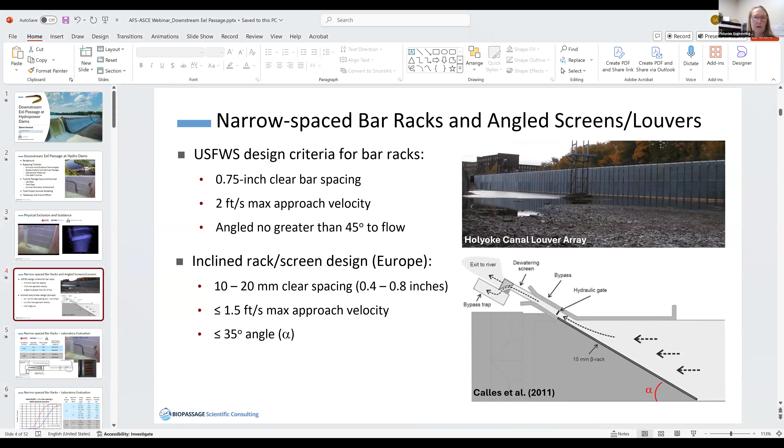So I want to talk about our speaker today. Steve Amaral founded Biopassage Scientific Consulting after working for 30 years at Alden Research Laboratory in Environmental Engineering and Services. He has a BS and MS degree in Fisheries Biology, both from the University of Massachusetts. Over the course of his career, Steve has been extensively involved in the design, evaluation, and application of fish passage and protection technologies at hydropower dams and various types of water intakes. He's also led survival evaluations of conventional hydropower turbine designs to pass fish safely, and several hydrokinetic turbine designs. He's assisted with the development of theoretical models for predicting turbine survival. Much of Steve's fish passage experience has been focused on state and/or federally listed species or species of concern. In recent years, he has led several studies investigating technologies for reducing turbine entrainment of silver eels and has worked on the development of desktop models for estimating turbine and total project survival. In addition to his experience with aquatic resource impacts at hydropower dams in North America, he's also worked on fish passage or protection issues for projects in Estonia, France, England, Romania, Serbia, New Zealand, Brazil, and Cambodia. That's a lot, Steve, and I'm excited to hear what you have to share with us today.

I've divided my presentation into three main things with respect to downstream passage. One is bypassing turbines - what technologies have been investigated to keep fish out of turbines, get them to a bypass system, go to the spillway, operational measures that may reduce entrainment, and the fish-safe turbines that have been in the news lately. Then I'll look at turbine passage, injury, and survival, focusing on lab data, field data, and some estimation methods currently being employed. And then I'll briefly talk about total project survival modeling.

So when you look at all the potential passage routes of eels moving downstream, what's a way of estimating that, particularly if you're not doing field studies - a desktop approach. And then finally, I'll cover what I think are the key takeaways from today's talk, and what future efforts may look like.

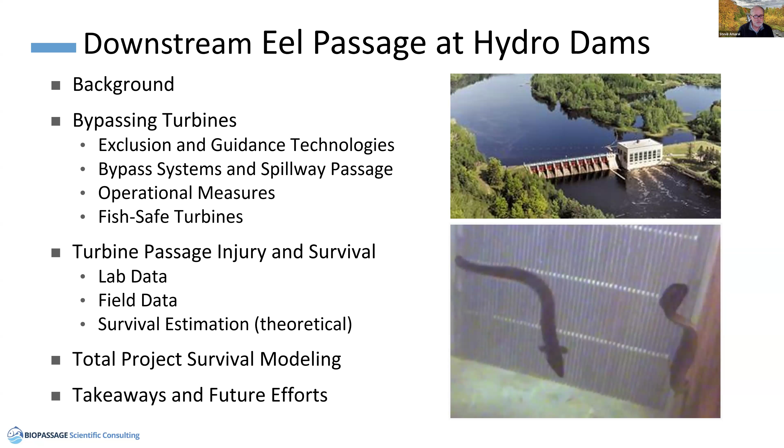So with that, I'm going to start with a couple of videos. I think it's important to remind everybody what we're up against with eels. They're a very unique species, not like anything else we try to protect from turbine entrainment. This first one on the left is a study conducted at Alden with WPI and funded by EPRI, using perpendicular bar racks. There's a bypass located on the left side here. This is a 3/4 inch rack, and I'll talk more about the data from this study in a second. You're going to see this eel approach the rack, interact with it, and eventually become entrained through it.

It does a little bit of searching, poking around, and then eventually it's going to stick its head through the bars and make a real effort to get through. It gets its head through, and it's gone. So yeah, that's the type of behavior we have to deal with when we're trying to think about how to keep these guys out of turbines.

There is hope though, and this video on the right is from a DIDSON camera from a flume study conducted at Alden - same study, but at night with all the lights out. This is the rack right here, and this is the bypass. You're going to see an eel come down on the rack right here, and then it goes over and does go into the bypass. So there is some guidance there.

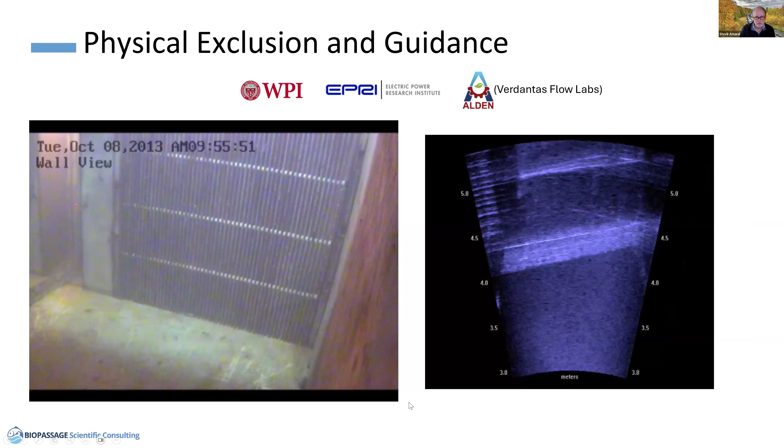Narrow space bar racks, I'm going to start with them, and angled screens and louvers. First off, the Fish and Wildlife Service has developed some design criteria with respect to eels, and I guess these would be applicable to juvenile alosines as well. That's 0.75 inch clear bar spacing, less than 2 feet per second max approach velocity about a foot in front of the intake, and an angle no greater than about 45 degrees to flow.

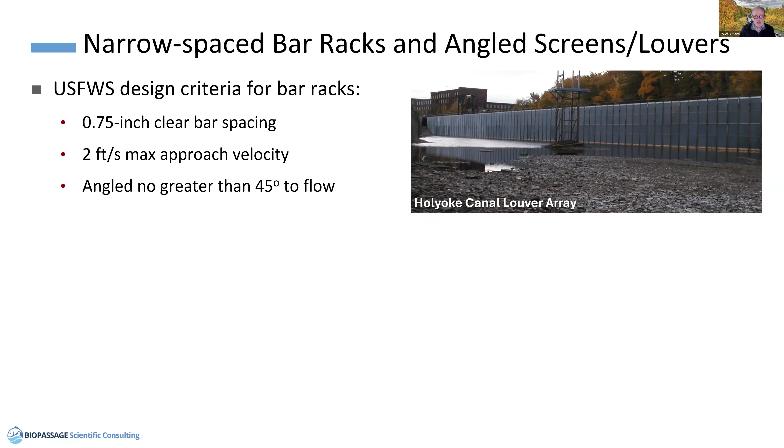The facility you see on the right is the Holyoke Canal louver array with the bypass at the downstream end. This has been tested with eels and likely has a guidance efficiency of about 60 to 80%, and that's a 2-inch spacing on it. It's at a 15-degree angle, so it's a very long sloping rack towards that bypass.

In Europe, they've been using some incline rack and screen designs. Typically they use 10 to 20 millimeter clear spacing, so that's about 0.4 to 0.8 inches. They've recommended about 1.5 feet per second or less max approach velocity, and with respect particularly to these incline designs, an angle of about 35 degrees or less. These have been installed at several sites in Europe, and there have been a couple of installations in Canada, and I believe there also have been a couple of installations in the US.

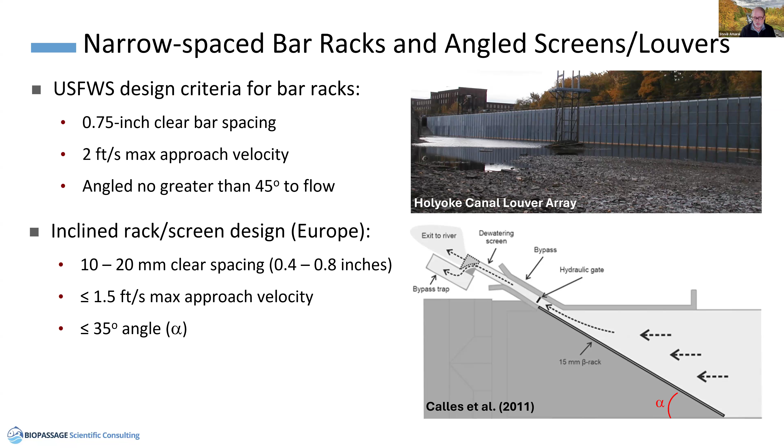Going back to the bar rack study that we did at Alden, we looked at 2 spacings, basically to compare the 1 inch that had been recommended up to that point for juvenile salmonids and salmon smolts, and then the 3/4 inch that was being recommended for eels. We also tested both these spacings at 2 different velocities, 1.5 foot per second and 2 feet per second.

You can see the average length of the eels that we evaluated, pretty typical probably for New England rivers, and then you see the mean bypass efficiencies. Not surprisingly, with the narrower spacing you did have greater bypass efficiency than with the 1 inch spacing. It did appear that the effect of velocity was greater for the narrower spacing than for the 1 inch. So 69 to 72% for the 1 inch and 89 to 96% for the 3/4 inch.

The test facility, we did release fish upstream. There was a wall here that kind of helped them stay on this side of the flume, so they interacted with the rack, and then you can see where the bypass was located. The picture on the right is just a dewatered snap of the test facility.

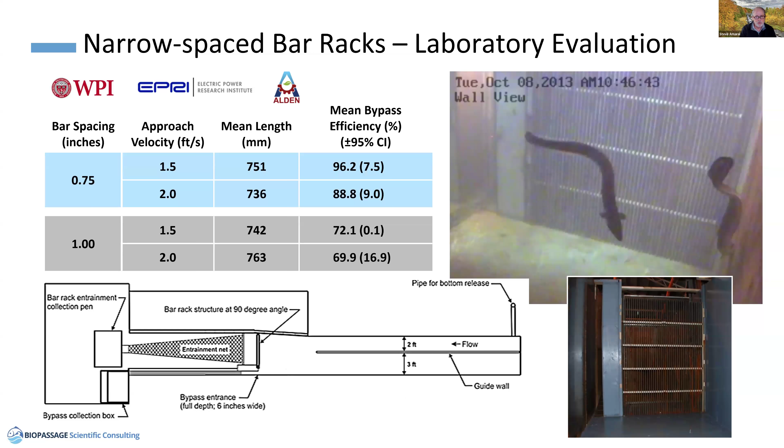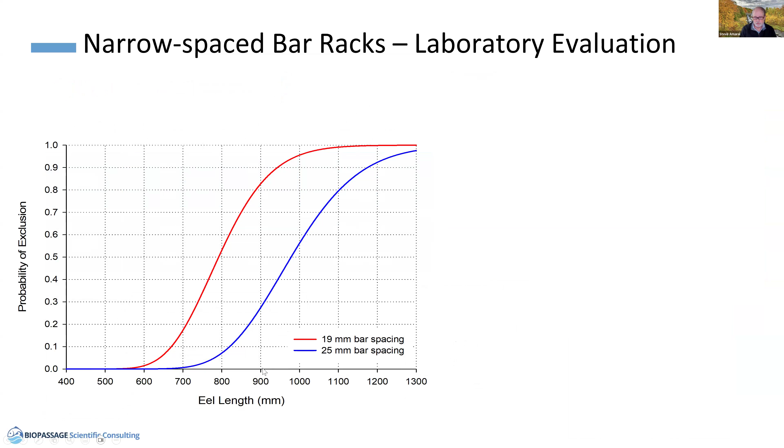Some of the interesting things we learned from this study: we were able to develop curves that show eel exclusion, physical exclusion by length, for the 2 different spacings. What we found out was that eels could have head widths, which is the most incompressible part of their body, that were up to 1.3 times the bar spacing and still fit through. They would basically have to have a head width greater than that ratio of 1.3 to have 100% physical exclusion.

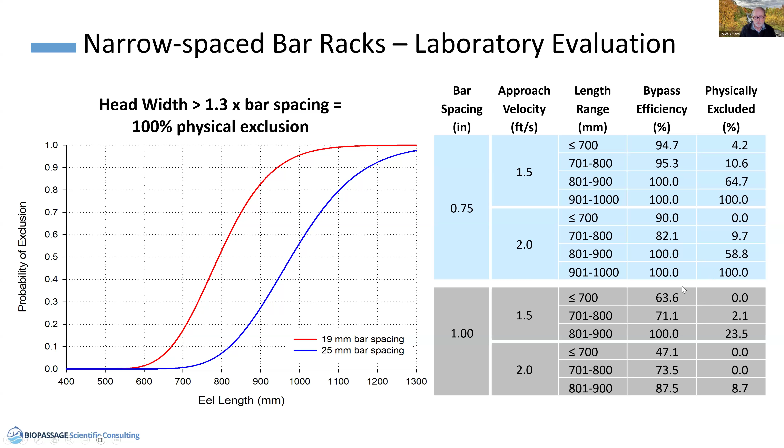Moving on to behavioral deterrents and guidance systems, there's been a lot of work done with these technologies since, I would say, at least the 80s. A lot of focus on light, both continuous and strobe, and a lot of testing with sonic and infrasonic sound and vibration. More recently, there have been studies with electric fields, turbulent and accelerated flow paths, and EMF.

One of the studies that myself and the folks at Alden were involved with was for the Eel Passage Research Center, a collaboration of power companies and agencies from Canada and the US involved with the St. Lawrence River. They were trying to identify potential methods to guide eels at the Iroquois water control structure, which is upstream of two big dams on the St. Lawrence. The idea would be if you could get them to a location across this structure, trap them, and then haul them downstream past the two projects.

Both of those projects, because of their size, it's really difficult to design anything effective at the site. They decided that the water diversion structure was a much easier facility to test this type of thing at, even though this water control dam is almost 1 kilometer wide.

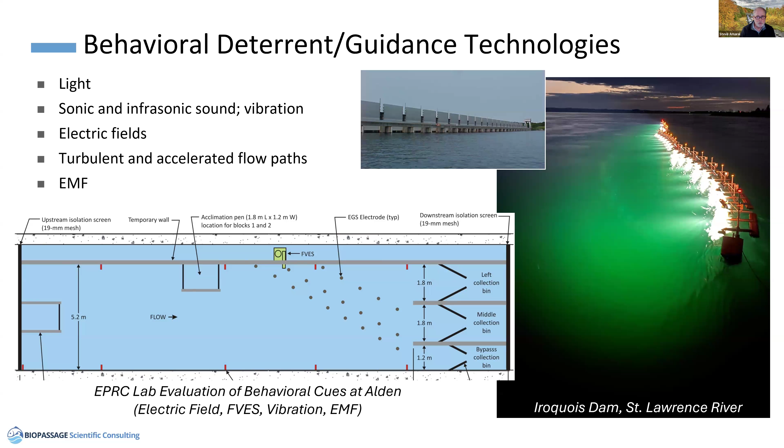Moving on to bypass systems, we have surface weirs, submerged entrances, mid or near bottom. There's a zigzag horizontal conduit developed by a company in Germany, and closer to home at the USGS Conte Lab, Alex Haro and his colleagues developed what's called an airlift system. I'll talk about each of these in more detail.

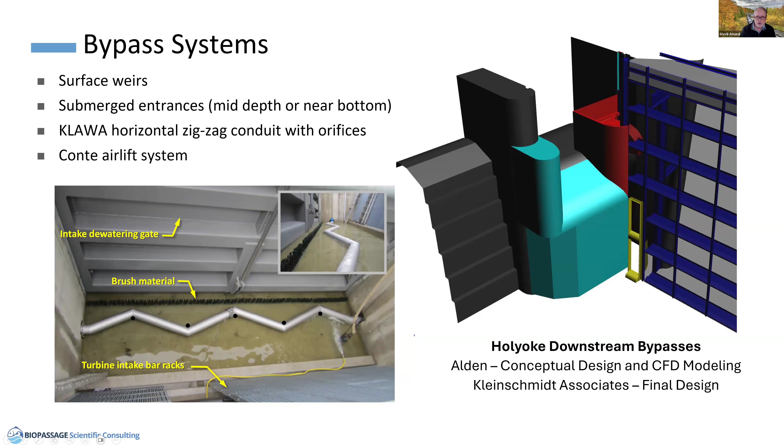What you see on the right is a downstream passage facility developed by Alden and Kleinschmidt for the Holyoke Dam. This is for a combination of species, and it includes both a surface bypass and a mid and bottom bypass for the more benthic species, which would include eel and sturgeon.

Alden did an evaluation of the KLAWA zigzag system that included both lab and field testing. This was funded by a grant from the U.S. Department of Energy Water Power Technologies Office. We had teaming partners that included Blue Leaf Environmental and Lakeside Engineering.

For the laboratory evaluation, we evaluated both the KLAWA zigzag and also vertical systems developed by Lakeside Engineering, John and Eric Truby. This is a 20-foot wide flume, a nice simulation of an intake with full-scale bypass systems installed. We tested both 1-inch and 2-inch bar spacing, and with and without a 16-inch perf-plate overlay on the lower portion of the rack for one test, then looked at entrainment and bypass efficiency.

The first test we did both bypass systems with a 2-inch rack and no perf plate. The bypass efficiencies were relatively low, less than 50%. We then tested the zigzag only, added the perf plate, and saw the zigzag system had a 75% efficiency. So the perf plate seemed to help slow down eels moving through the rack and gave them an opportunity to find the bypass openings in the zigzag.

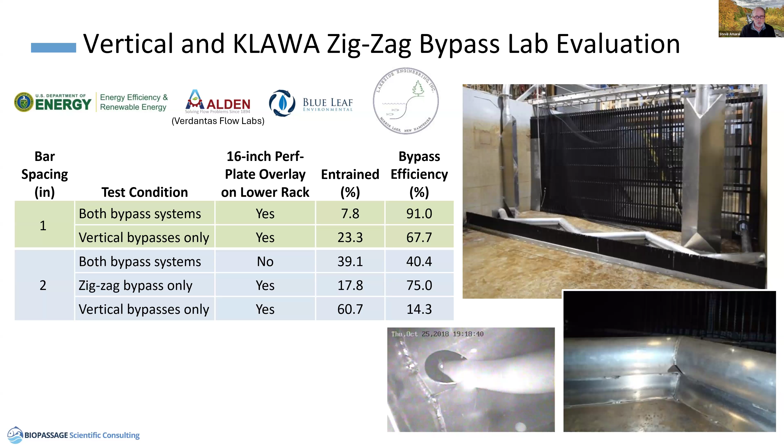Based on the positive test results with the 1-inch spacing, we went to a field site—essentially supersizing our test flume—with a nice intake channel down to racks in front of 2 turbines. Unfortunately, only one of the turbines was operating for the testing, but the Trubies did install the system across the whole intake.

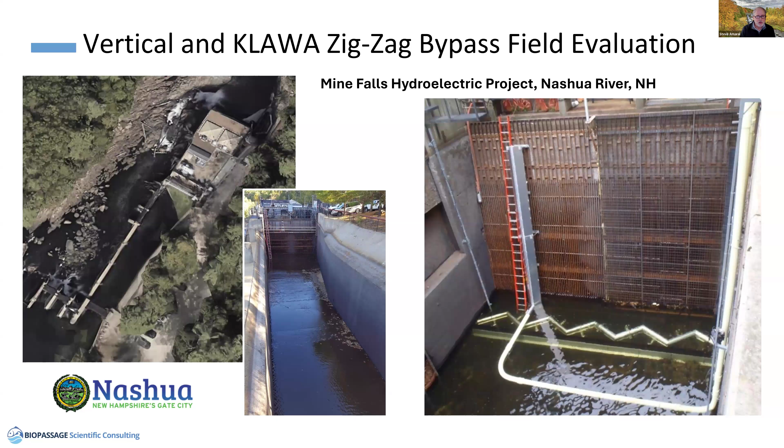We put an overlay of just over 1-inch spacing on the operating turbine, and tested with and without that overlay for the reduced spacing. This was on the natural river up in New Hampshire. The results weren't as good as we saw in the lab. We did 4 separate releases: 3 with the narrower bar spacing, 1 with the larger 3-inch existing spacing.

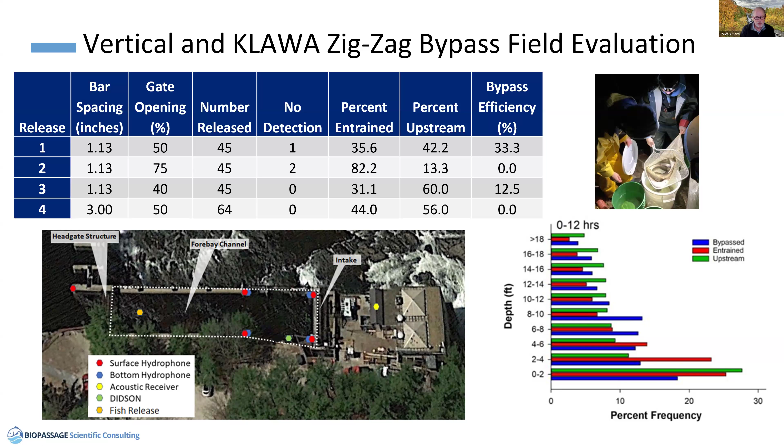You can see our setup here with the acoustic receiver arrays in the channel and where we release fish, the yellow dot. Some interesting findings with respect to eels: they did do some searching when they came to the intake. However, most were found in the lower 2 to 8 feet of water depth, which is where we'd expect them at most projects. But they will search vertically, and that was one reason for developing the vertical bypass design as well.

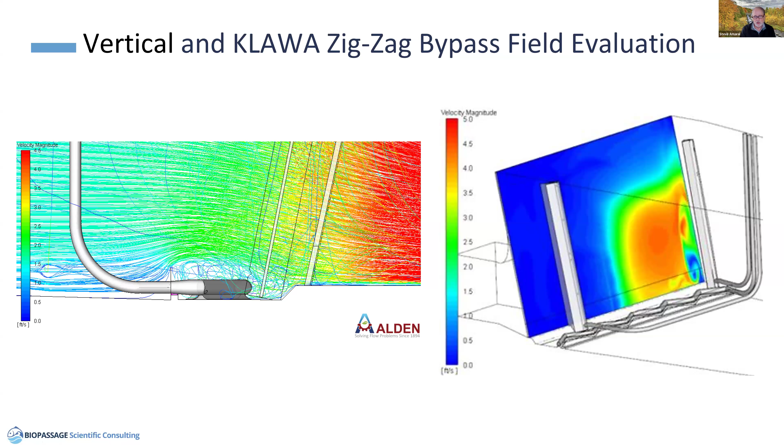This is probably the reason for the poor performance: we have high velocities. This is a CFD model done by Alden. You can see a section with flow moving left to right, a zigzag system on the bottom, and then the intake rack. Velocities get up to almost 4 to 4.5 feet per second in some areas, which is simply too fast for the fish to overcome without being pinched or entrained. At a better site, without those kinds of velocities, this system might work better.

There's a system installed at a project in Connecticut, the Upper Collinsville project, which was an abandoned site completely rehabilitated to produce power. They put in a pretty nifty bypass system for shad, herring, and eels. Although it's a zigzag system, it wasn't constructed by KLAWA, it was done by Wasserkraft. You can see they have a horizontal 3/4 inch rack.

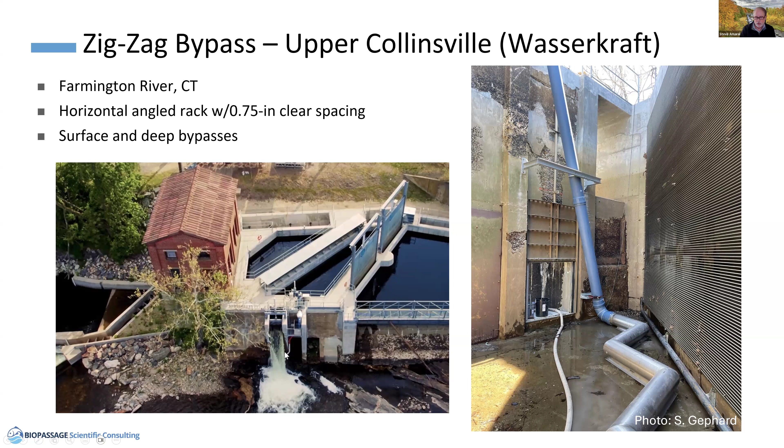They have the zigzag system for eels, with surface and deep bypasses. You can see the surface spill here. This is actually the outlet for the zigzag system, and then there's a collection tank where they take the eels out, handle them, count them, and put them into a little chute to go back to the river. A few more pictures of this system.

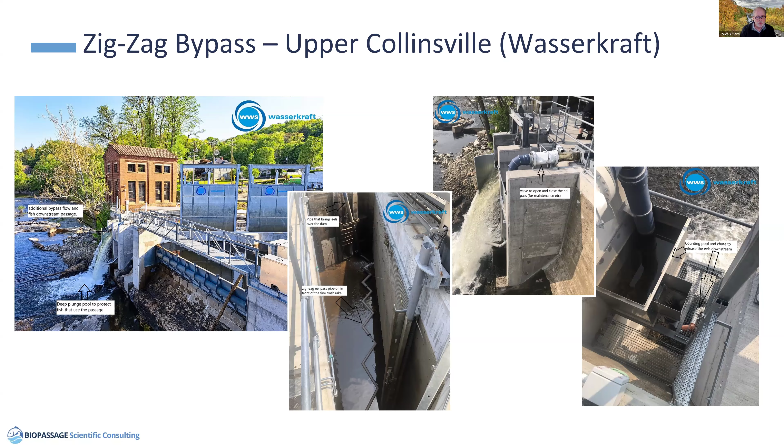They have not done any evaluation of the effectiveness of this system, and from what I was told, there are no plans to actually test it at this point.

The airlift bypass system was developed by the Conte Center by Alex Haro and his colleagues. It's basically a low-level bypass with a riser filled with pumped air. It creates a current going up, and fish enter at the bottom and go up, discharging in these applications into a collection box where they can be removed and put downstream. It was installed at two water supply reservoirs, and you can see the number of eels collected in the system during the years it's been in operation.

Moving on to spillway passage and survival. Spillways in existing gates can often be used for safe downstream passage. At many sites, survival rates will be greater than for turbines, likely exceeding 95%. However, you do need sufficient flow over the spillways.

I'm not sure we really know what is required for eels, but in order for them to pass there probably needs to be somewhere around 3, 6, 9 inches of depth, something that could be investigated. I know there are requirements for shad, herring, and salmon as far as minimum depths over the crest.

Typically you'd have to do an assessment of the spillway design to determine how fish-friendly it may be, just by looking at the flow going over, the hydraulics, turbulence, and what the fish are landing on. Based on that assessment, you may want to do an evaluation of survival. There's not much you can do about fish passing over spillways, obviously. Eels go out typically with pulses of flow, so you're likely having a spill event, and you can't really keep them away. But when you estimate total project survival, you want to make sure that component is accurate.

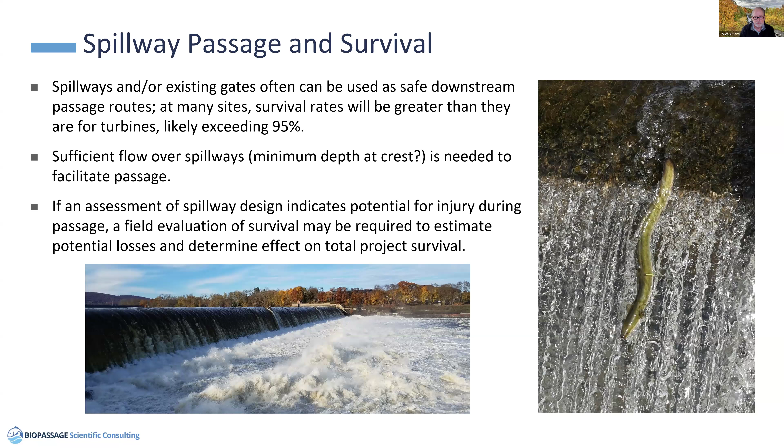So there have been a couple of spillway survival studies done, and the data included on this slide is from an evaluation at Turner's Falls, FirstLight generation complex there. It includes Northfield Pump Station, Cabot Station, and a couple of smaller units in the canal. But certainly the gates at the Turner's Falls Dam are potential passage routes for eels moving downstream.

This table was pulled from the Kleinschmidt, Gomez, and Sullivan report. Normandeau did the testing using balloon tags. They evaluated the turbines and the Bascule gates. You can see here in the highlighted rows, Bascule Gate 1 up top and Bascule Gate 4. So this is Bascule Gate 1 here, Bascule Gate 4 would be on this side. They did releases at 3 different discharge rates for each gate, and you can see a combined estimate of survival.

You have immediate 1-hour survival and total survival after 48 hours. This 82.9 looks a little suspect given the 3 flow rates had higher survival, so I'm not sure if that's a typo, but you can see it range from about 85 up to 88% for Bascule Gate 1 and 83 up to 90% for Bascule Gate 4... 93.3%. Interestingly, the units at the downstream end of the canal at Cabot Station had survival rates of 96%. So you're actually getting better survival through the units than over the gates at this location, which may be the case at some projects.

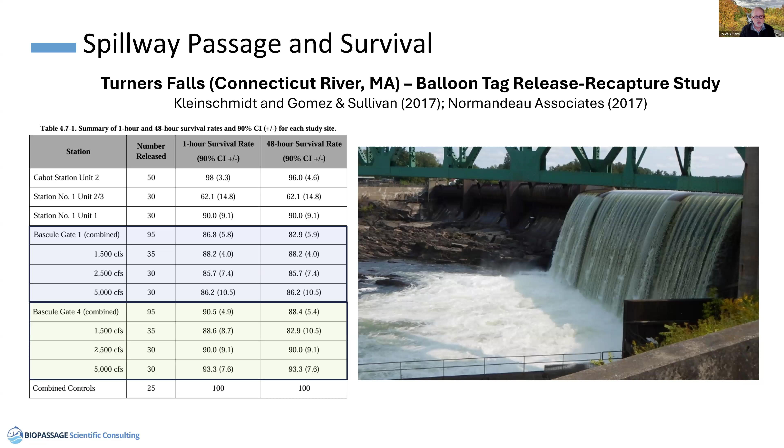Another study that I was involved with was conducted by Alden for the Woonsocket Falls project in Rhode Island. It's owned by the city of Woonsocket, but operated by Thundermist Hydro. Small project with a 10-foot dam. It's a Corps of Engineers dam. The intake to the turbine is further upstream here.

And the plan here may be for nightly shutdowns and then allowing eels to pass over the spillway. Fish and Wildlife Service requested the spillway survival study. It's kind of a unique approach we took in that there wasn't easy access downstream for a balloon tag effort—no boats or anything like that for getting people down there. And again, being a small dam, you can see there's a sidewalk up here where the public walks right by, and then there's this wall down to the base of the spillway.

So what we ended up doing was we built a pipe here, put tethers on fish, attached them to a rod and reel and fishing line, and released them through the pipe over the dam. Then as they came over the ogee, we picked them up with the fishing line and put them into this net and pulled them up. You can see them being emptied out here. So this fish on the right is actually tethered to the fishing line as it's going over the spillway.

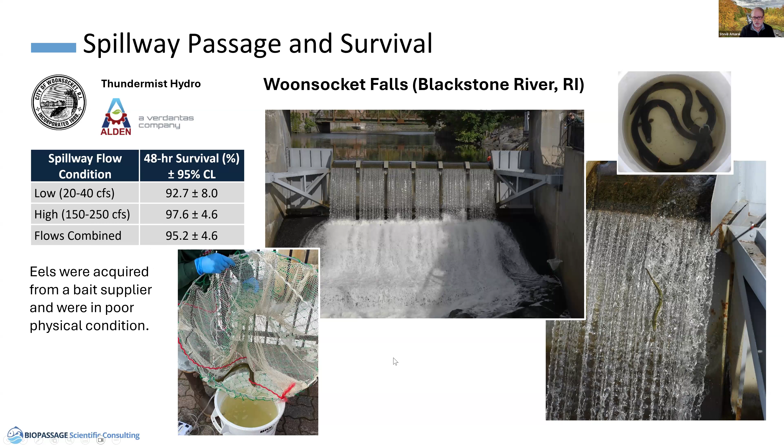All right, moving on to operational modifications. Nightly shutdowns are something that can be done from 6 p.m. to 6 a.m. for the entirety of the specified downstream eel migration period. You also may be able to do targeted shutdowns based on precipitation events, or reduce generation so you're reducing flow and hopefully reducing the number of fish that go into the turbines. Bypasses can be used if sufficient spill is needed to get the eels downstream, and there's been some work done with models to predict the peaks and help with operational modifications.

A lot of this work has been done in Europe, and you see an example here from some projects in France, where they basically have reference sites, look into migration surveys and environmental cues, develop prediction models, and then apply it on a wider basis.

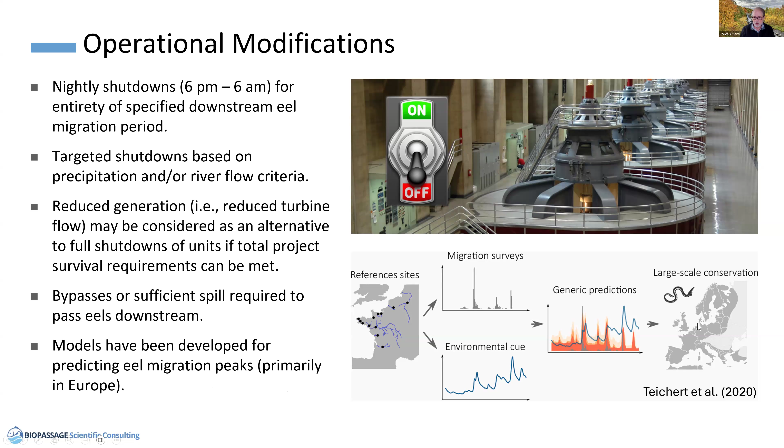Moving on to turbines, there have been several developments with fish-safe turbines that are very applicable to eels. The Alden turbine, some of you may be familiar with, has not been installed anywhere, but it was tested with eels in the early 2000s in a pilot scale facility. Basically it's designed with a few blades, so very wide spacing, no gaps between the blades and the outer ring or the hub.

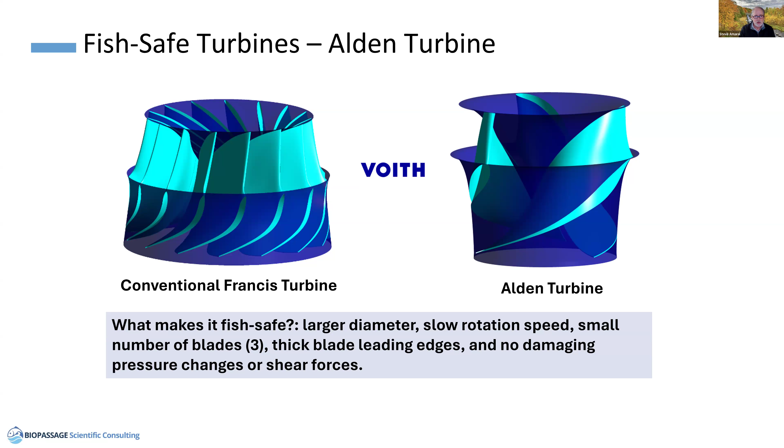It was designed to reduce damage, pressure, and shear. It's a radial flow unit like Francis turbines, but unlike Francis turbines, which have 12 to 16 or 18 blades, it only has 3. Again, those wide gaps between the blades reduce the probability of strike, and thicker blade leading edges help reduce strike mortality. We think survival for that turbine could be 98% to 100% for silver eels.

I can't imagine most people have not seen any news on the developments with the Natel RHT turbine. A. Schneider provided me with this slide and a couple others. They've had some very successful testing with this unit that's been evaluated in their test facility in California. You can see the conditions here: 10-meter head, 55-centimeter diameter, 667 rotational speed.

They had 100% survival immediately and at 48 hours. So these slanted curved blades, you can see the eel passing through. Despite the high rotational speed and the small diameter of the unit, the eels were able to get through with 100% survival.

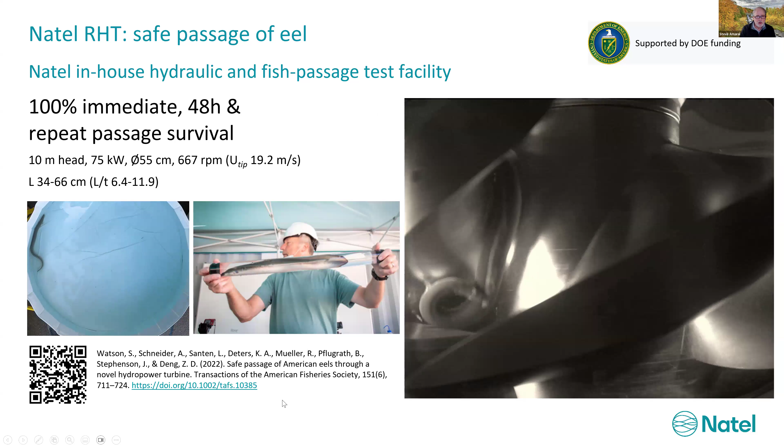Natel is now working on developing these turbines for hydro modernization at a wide range of projects with respect to project size, head, and flow. They're expecting greater than 98% eel survival for these full-scale systems.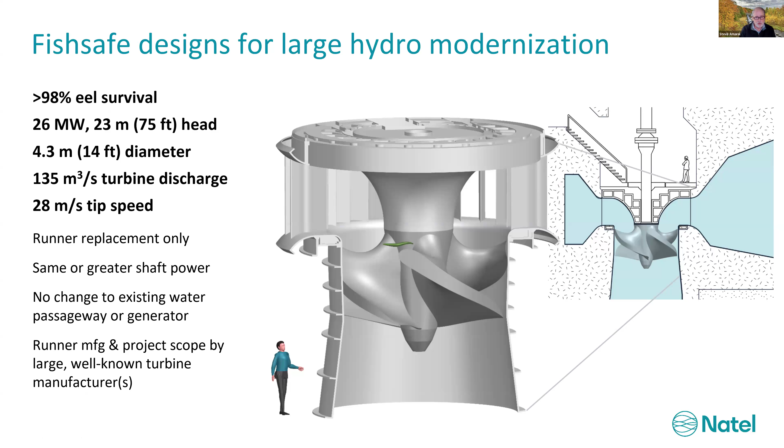And just a couple of conceptuals here for different designs of these units, including a Francis turbine with fewer blades. But you can see the theoretical estimates, which are based on CFD modeling and the lab data. So there are expectations for these types of units if they are installed. Very, very promising and good results.

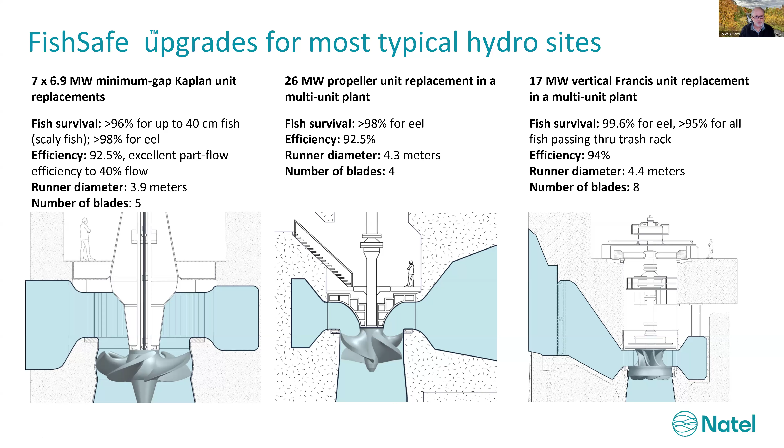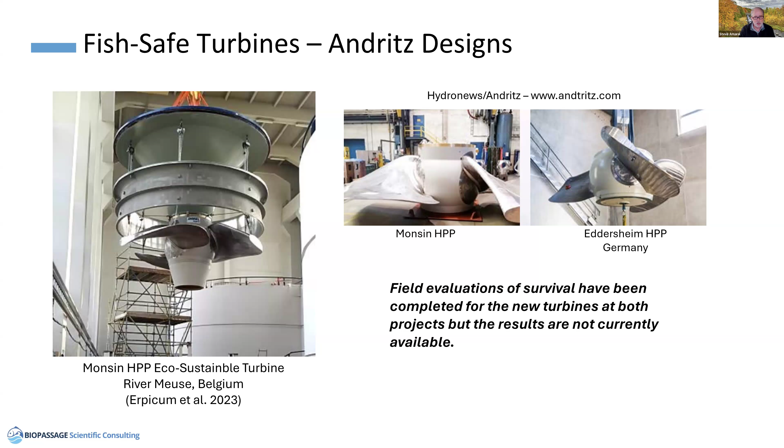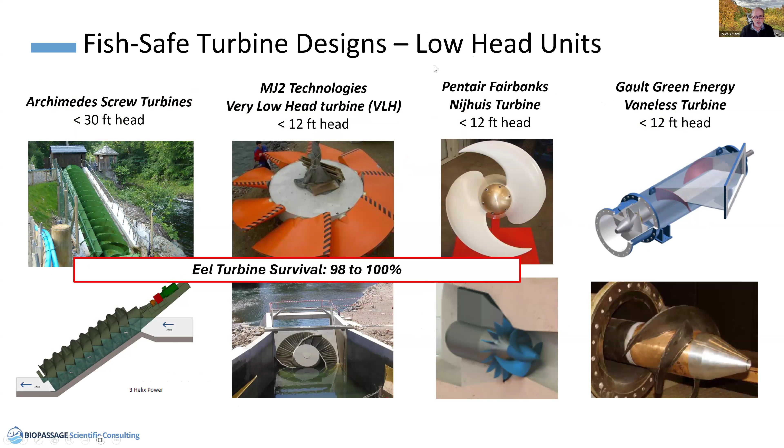There are a number of low head turbine designs like the Archimedes screw, the VLH, and this Nijhuis turbine. They have been developed for heads typically less than 30 feet and some of them for less than 12 feet. But there have been testing done at least with these 3 designs, and again, very promising 98 to 100% survival of eels going through these units.

All right, now that I'm through all the sort of options for downstream passage technologies to improve survival of eels, I'm going to take a little deeper dive into the turbine injury mechanisms and survival studies, and a little bit of history. This stuff has been going on at least over the last 30 years, but even longer than that for some of the field evaluations.

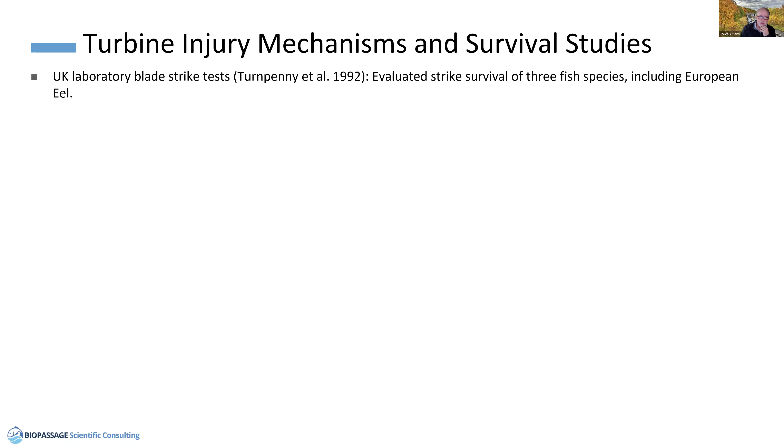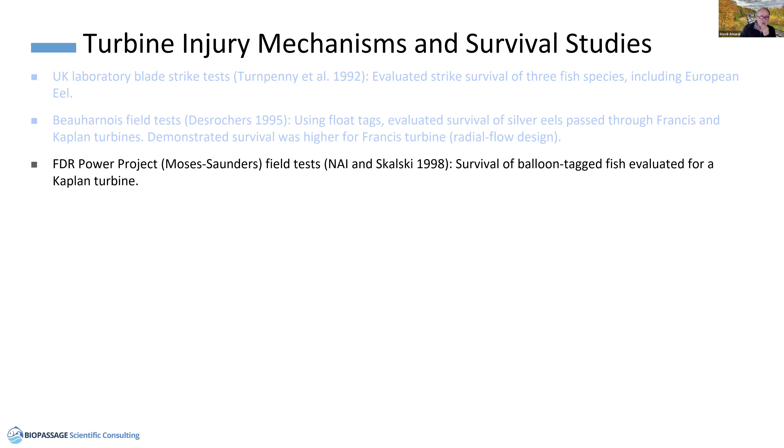There were some blade strike tests done in '92 with European eels. Some of the first field tests done in the US were on the St. Lawrence project, including the Beauharnois, which had a Kaplan, and the Francis turbine. Moses Saunders, upstream of Beauharnois, had balloon tag studies conducted there.

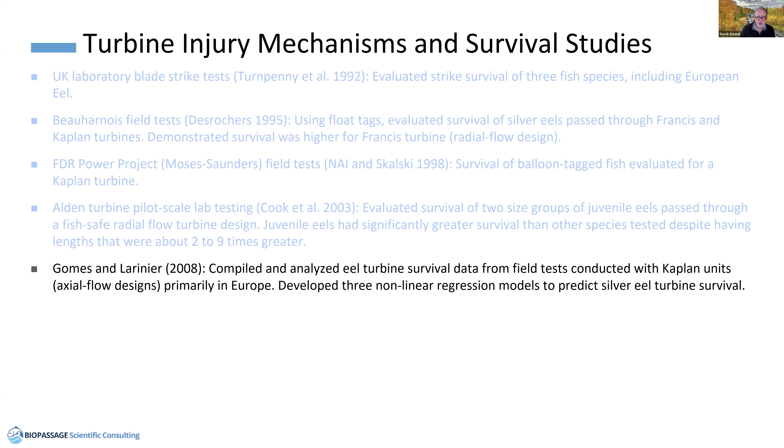Alden did the pilot scale testing with its fish-friendly unit and 2 size groups of juvenile eels. Gomes and Larinier compiled the field data from European studies and some of the US and Canadian evaluations, and developed some nonlinear regression models for predicting survival.

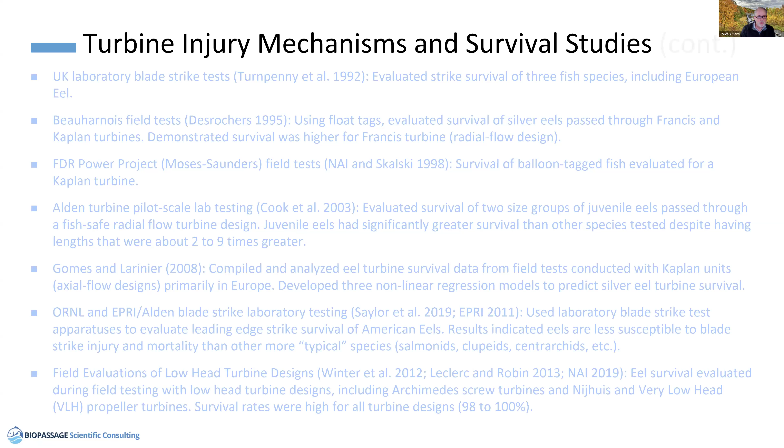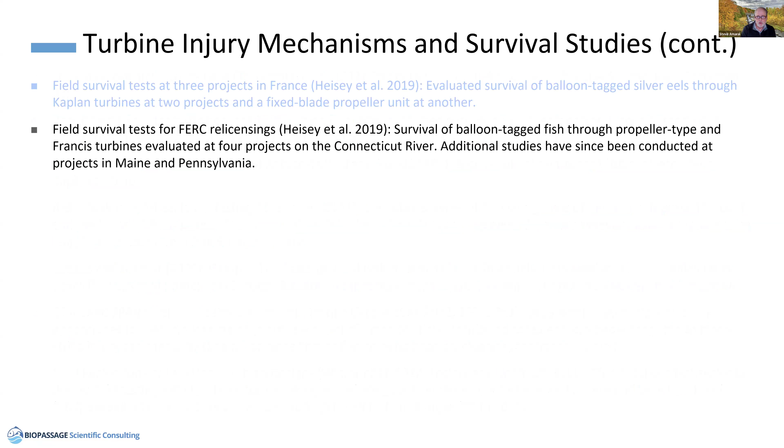There was some laboratory blade strike tests conducted by Oak Ridge National Lab and by EPRI and Alden. Field evaluations of low head turbine designs were conducted, and again, 98 to 100% for some of those. More field testing was done in France for 3 different units by Normandeau. And then there were field survival testings for many of the FERC relicensings that were conducted recently, both Francis and Kaplan type units in the Northeast.

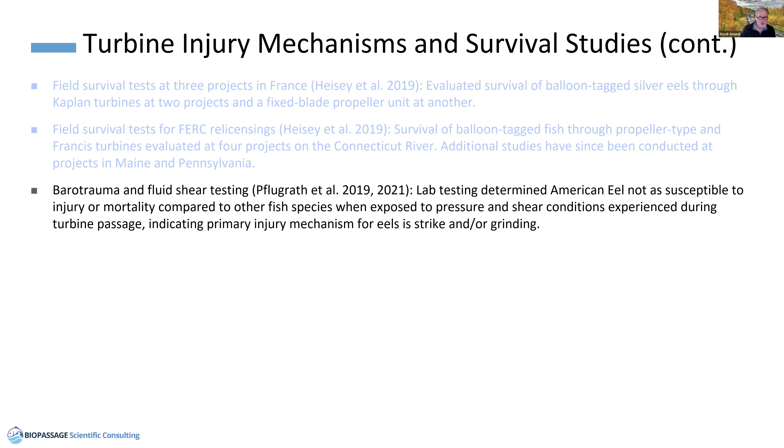PNNL did some barotrauma and fluid shear testing with eels, and the big finding there was that they weren't as susceptible to damaging pressure and shear levels compared to other species, and they concluded that strike and grinding were likely the primary mechanisms for eel injury going through turbines. Then, of course, Natel and its RHT turbine development and the evaluations that they've done with their facilities in California.

So just to get everybody on the same page as far as the two different primary turbine designs we have: radial flow units like the Francis turbines on the left, and then the axial flow unit on the right, which would be a Kaplan or a fixed blade propeller. So fish entering the scroll case, moving down through here axially, the eels moving through here, the scroll case, and then entering the unit radially.

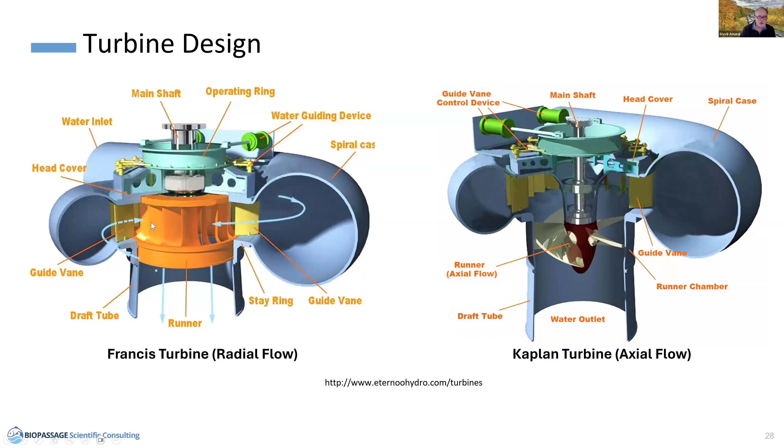This is the results from the Alden testing in the lab with a pilot scale runner, 40 feet head, 245 RPM, best efficiency. These are the species that were tested, and these are the non-eel species.

You can see the relationship between length and survival. It's what you would expect: the longer the fish, the greater probability of strike and mortality. However, when we put the eel data on here, it's off the chart, much greater survival than for the other species.

So 100% immediate survival for the two size groups, 99.6% for the smaller fish, and 98.3% for 96-hour survival. Keep in mind this is a radial flow unit like the Francis turbines, which we've since determined eels do much better going through, but with only 3 blades it's got much wider spacing.

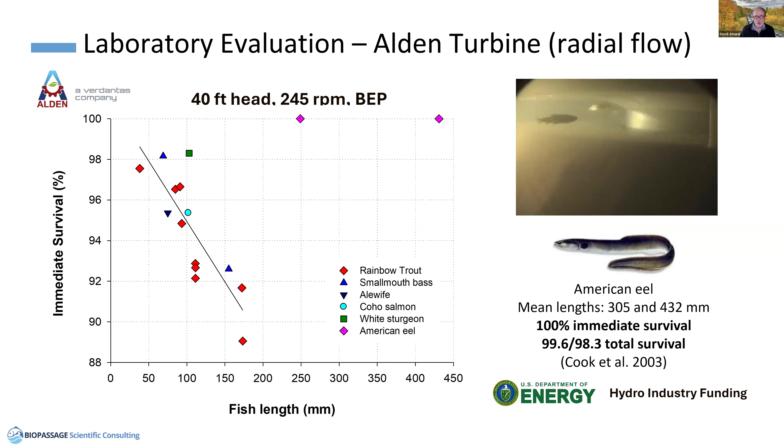I've already talked a little bit about the Natel unit. They did testing with two different settings of turbines, and got pretty much 99 to 100% survival.

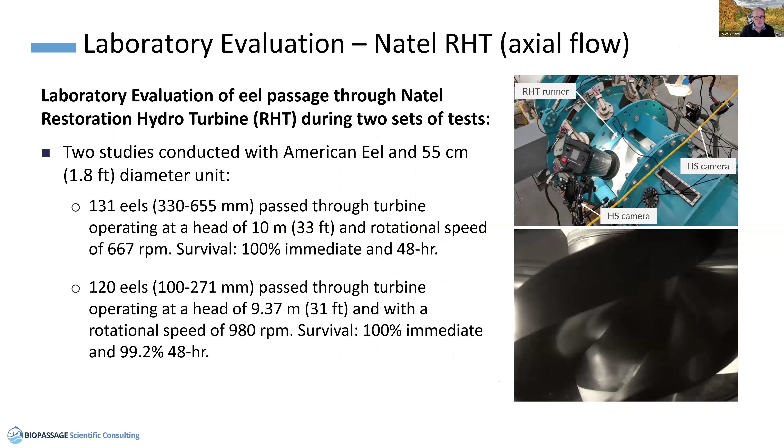A couple observations from blade strike: we had high survival rates for Alden and Natel, indicating basically few eels are being struck, or they are being struck and survival is very high. For the Natel lab test, where you had a very small diameter unit, most of those fish probably are being struck, but because of the blade design, survival is extremely high.

Solomon and Turnpenny, from blade strike studies, concluded that the sinuosity of fish is a way of reducing the effective length exposed to blade strike. This would reduce blade strike probability, and you can see in the right-hand pictures that's something eels can do very well, the ability to curve and bend easily.

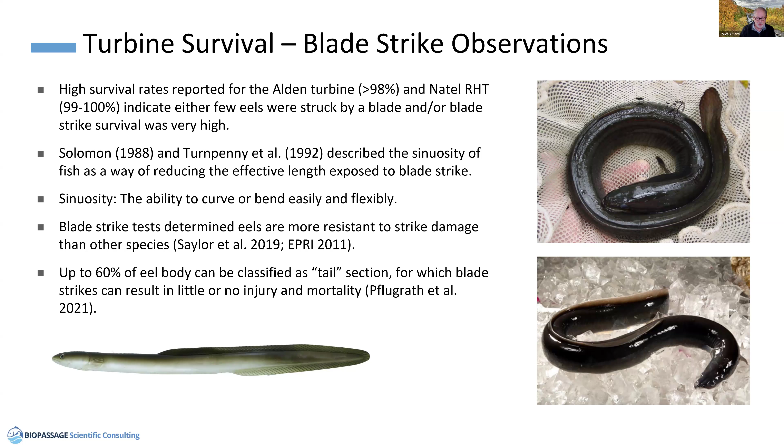Blade strike tests have determined that eels are more resistant to strike damage than other species. It's been shown that 60% of the eel body can be classified as tail, for which blade strike results in basically no injury or mortality.

As far as that sinuosity, I took these frame grabs from one of the Natel high-speed videos. You can see the eel entering and going by the blade, curving and really reducing its effective length as it passes, which would reduce strike probability.

I mentioned that Gomes and Larinier had compiled a bunch of field data, with 51 tests from 19 projects. They created best fit regression models incorporating eel length, runner diameter, rotational speed, and turbine flow, and the number of blades. Number of blades was not identified as effective, but that's mainly because most units were 4-bladed.

However, they probably could have looked at blade spacing, which would have given them a better parameter, and that probably would have shown some correlation.

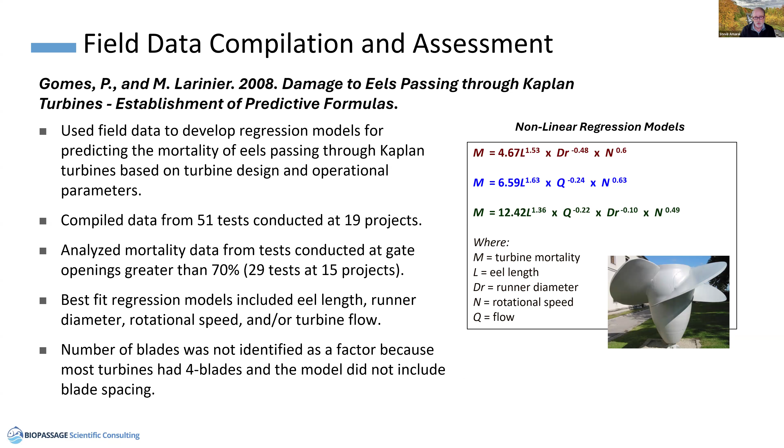Alden updated the analysis of Gomes and Larinier by including tests with wicket gate openings less than 70%. We estimated the actual flow rate going through each gate opening, included blade spacing as a parameter, and added survival data from additional sites where balloon tag studies had been conducted. We also added other turbine designs so you could look at each one separately, and for Kaplan propeller turbines we developed multiple linear regression models to predict turbine survival.

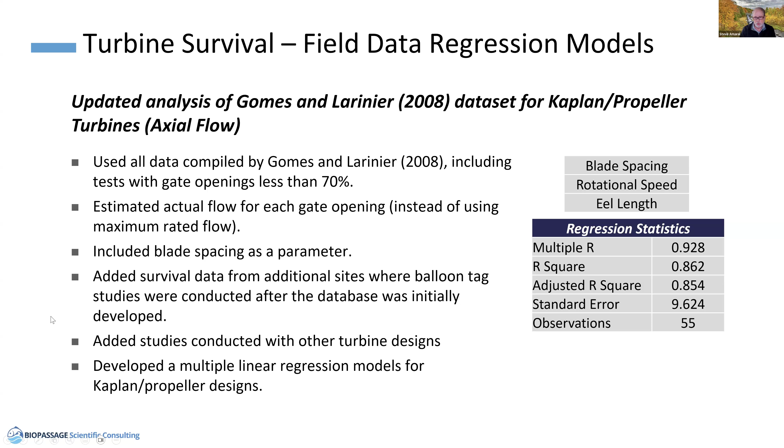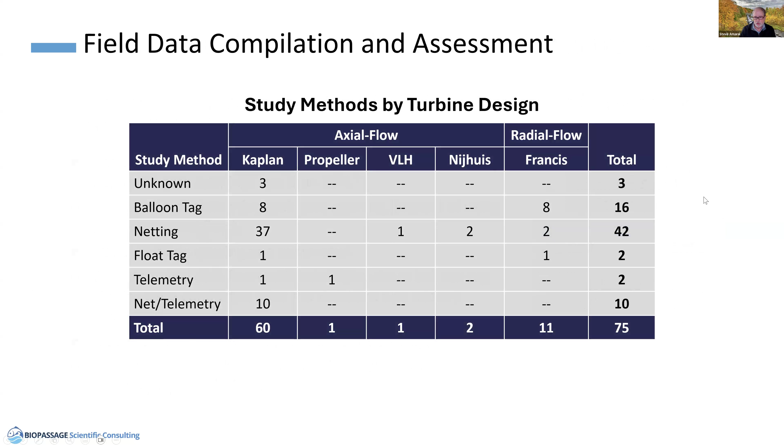This shows a summary of the different turbine designs in the database and the studies that were done, most being netting or netting and telemetry, but more recently balloon tags done with both Francis and Kaplan units.

Some of the regressions we did on individual parameters showed their relevance to survival. For blade tip speed, the R squared was about 0.12, not very high, so it doesn't explain a lot of variability. The same with gate opening, no relationship there with survival. Even eel length didn't produce a great relationship, which might be in part because eels are constantly changing their length as they pass through the units.

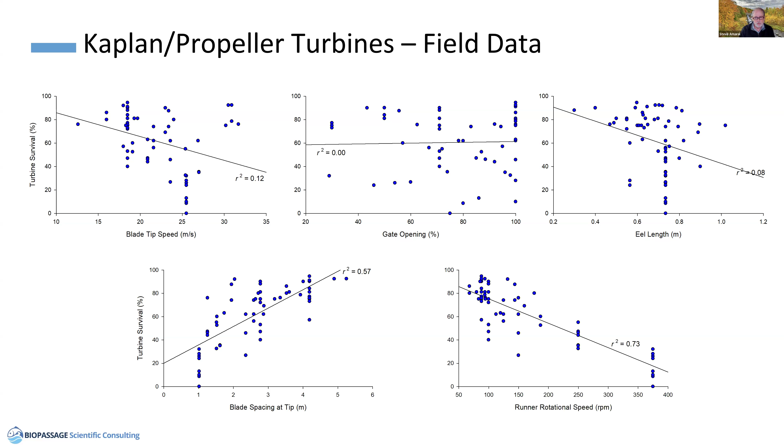The two parameters that stood out were blade spacing at the tip, a relative measure of the space between blades available for eels to pass through, which showed relatively good correlation, and rotational speed. Those two have a big effect on strike probability for eels passing through the turbine.

These are field tests conducted with just balloon and float tags. The columns I've highlighted are rotational speed and blade spacing. Essentially, as rotational speed increases and blade spacing decreases, survival decreases. However, at the lowest blade spacing and highest RPMs, at Vernon they got pretty good survival, not necessarily something we would have predicted.

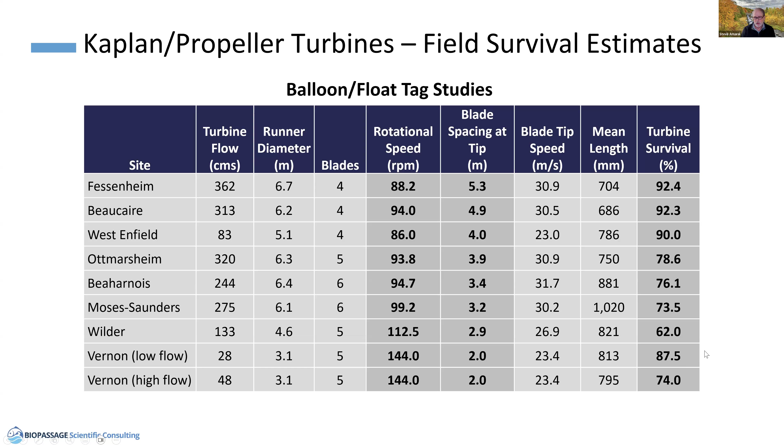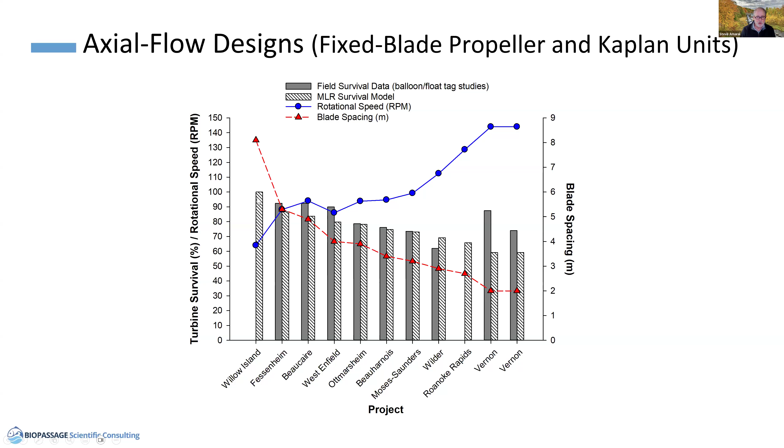This is just a graph of that data. You have rotational speed in blue increasing, blade spacing decreasing, and survival typically decreasing with those parameters. We've included both the regression model results and the field data, so you can see that the regression model tracks pretty well until we get to those Vernon sites. We also included two sites, Willow Island and Roanoke Rapids, where we just did the theoretical or linear regression estimation.

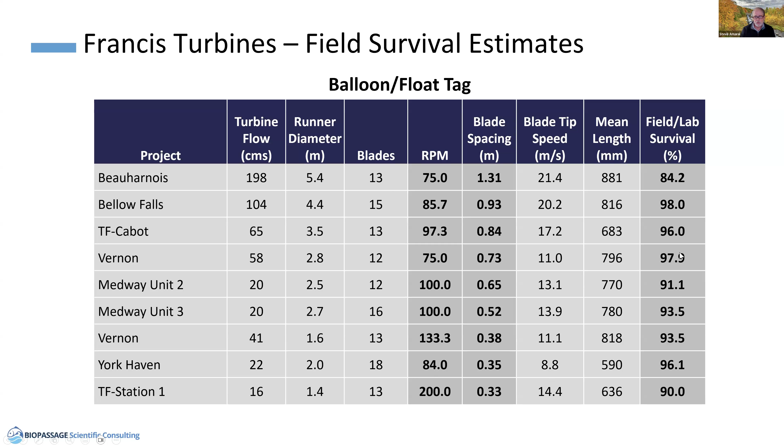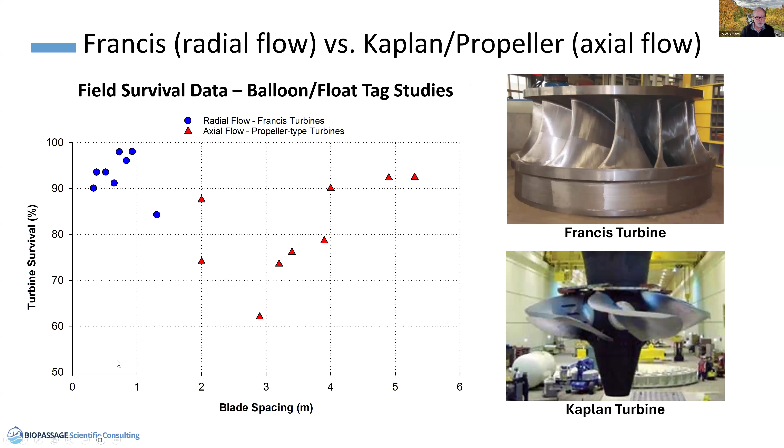So these numbers look a lot better than the Kaplan turbines, which have fewer blades and greater blade spacings. This is a graph of the blade spacing for Francis turbines and survival, and then the Kaplan or propeller units here. This would be completely opposite for any other species, but for some reason eels have been able to get through the Francis units with less damage and mortality.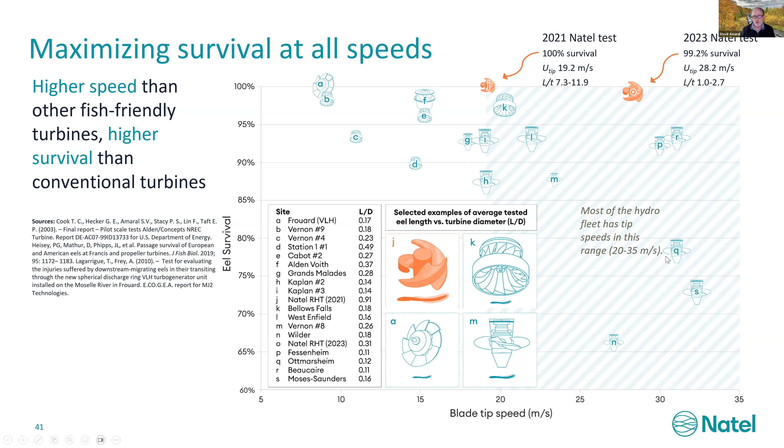So you can see the Natel turbines up here, high tip speeds, which could be an indicator of strike velocity. And then for these other more conventional units, greater tip speed generally means lower survival.

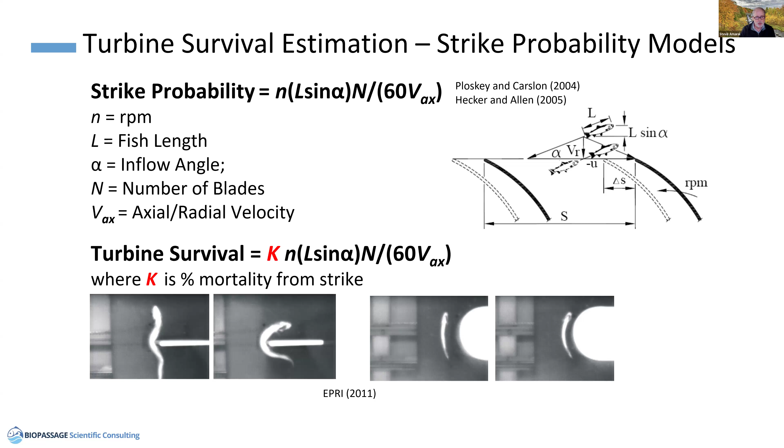The theoretical models - this one is basically predicting the ability of fish to get between two blades without getting struck. This is the one that Alden uses quite a bit, and it also incorporates blade strike tests that estimate mortality if a fish is struck, based on the fish's length, strike velocity, and the ratio of the fish length to the blade thickness. This is very similar to the Franke method.

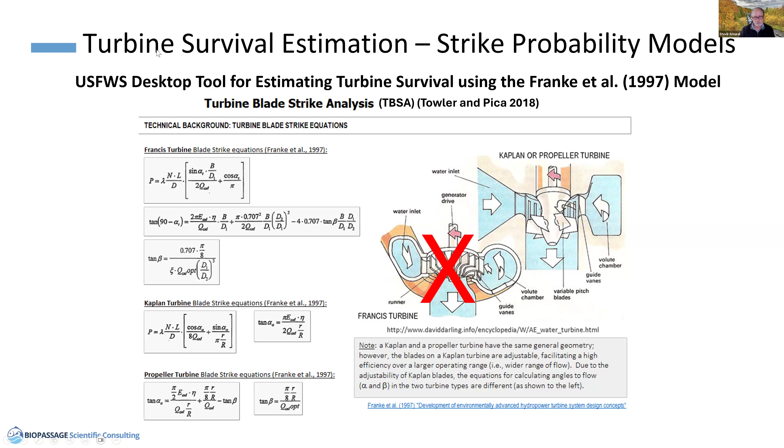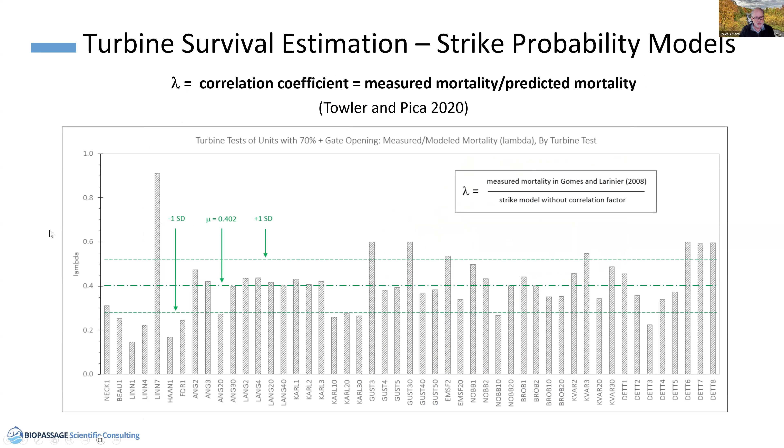Here's the desktop model that was developed by Fish and Wildlife Service that a lot of people are familiar with and using. However, you can't use it for Francis turbines, basically because of what we've seen with eels, and it would be an underestimation. I would say it's also an underestimation of survival for Kaplan and propeller units, but Brett Towler and Jessica Pica did develop a lambda, or mortality coefficient, based on the field data from Gomes and Larinier. 0.4 is what they've recommended to apply to the theoretical model for eels. However, there is a bit of variability in the data, and it is one number that you're now applying to every unit and every length of fish. So there has to be some caution when using that model.

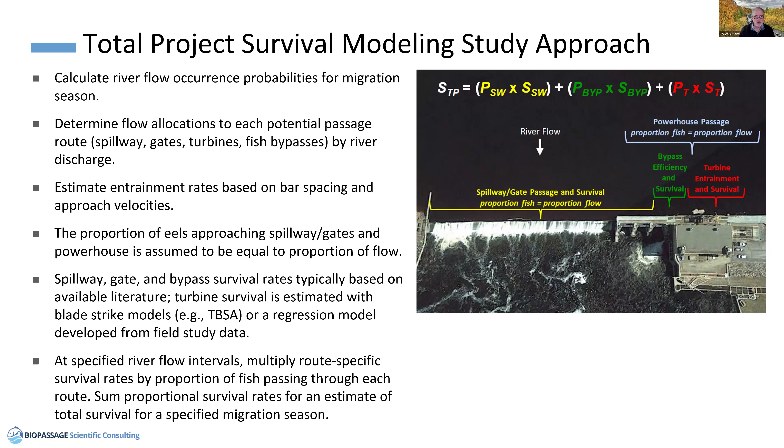So getting into the end of the talk, my takeaways: methods for safe downstream passage, bar spacings, racks, and screens should be selected based on the level of exclusion required to meet total project survival. However, less than 1 inch may be needed, but there may be sites where 1 inch may be adequate. Max approach velocities should be about 2 feet per second. There's considerable evidence with respect to light being a method for repelling eels.

I'm not as high on some of the other behavioral deterrents, but maybe there's more work that could be done here to improve pushing fish away from turbines and toward bypasses.

There are several eel-specific bypass designs that have been developed and tested and should be considered when you're designing your downstream passage facilities. Fish-safe turbine designs are available for a wide range of projects, heads, and flow rates.

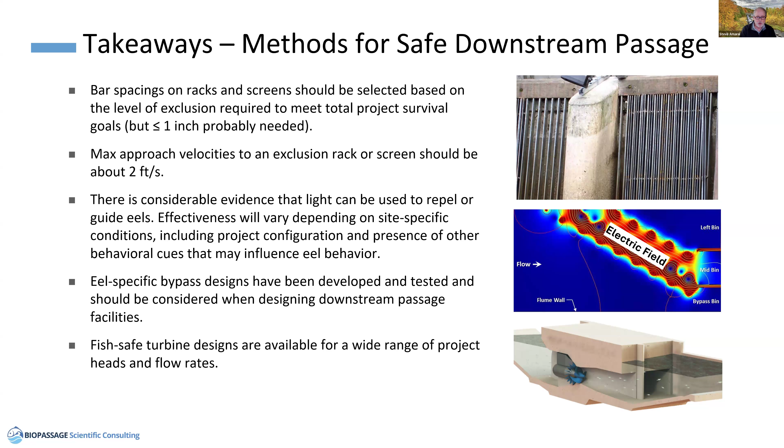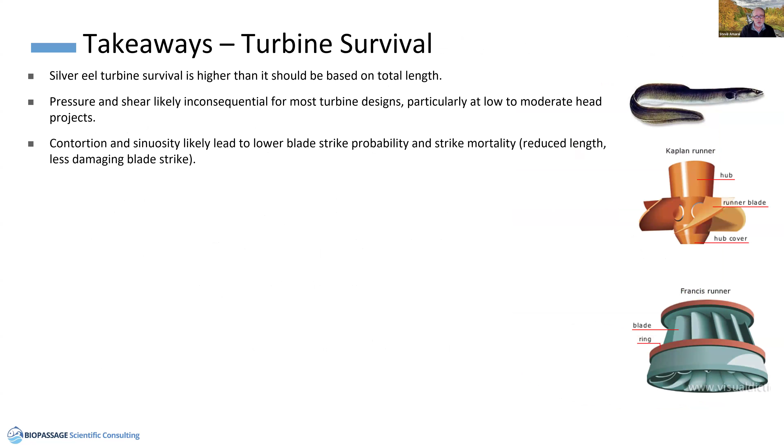With respect to turbine survival, eels have higher survival than you would expect based on their length alone. Pressure and shear are likely inconsequential for most turbine designs, particularly for low to moderate head projects. Contortion and sinuosity likely lead to lower blade strike probability and strike mortality.

For each turbine type, excluding the fish-safe designs, decreasing rotational speed and decreasing blade strike produce greater survival, and eel length likely has a lesser effect.

Survival typically decreases with increasing tip speed due to higher strike velocities, and the fish-safe turbine designs do incorporate features that reduce strike mortality at these higher tip speeds.

Several fish-safe designs and low head turbine designs, both for larger projects and for low head projects, are currently available, and I've shown survival rates as high as 98 to 100%.

Survival is higher going through Francis units than it is for propeller units, likely due to the way the eels are entering the runner and interacting with the blade.

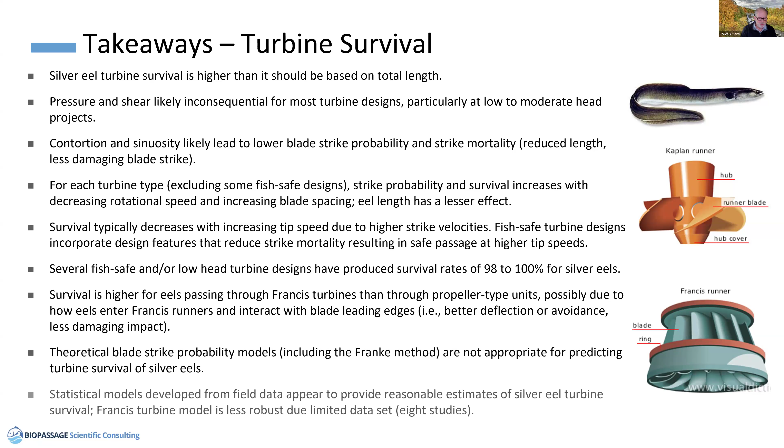Theoretical blade strike models probably shouldn't be used with eels, and maybe the linear regression models could be more appropriate.

Finally, for future efforts, basin-specific migration data would be helpful to improve models for predicting peaks in downstream movements, route selection, and spillway survival rates. We could use more information there.

Full-scale testing of the fish-safe turbines, hopefully that's going to happen soon, particularly with the Natel and Alden units, and then validation of the desktop models. And I will go ahead and end it there.

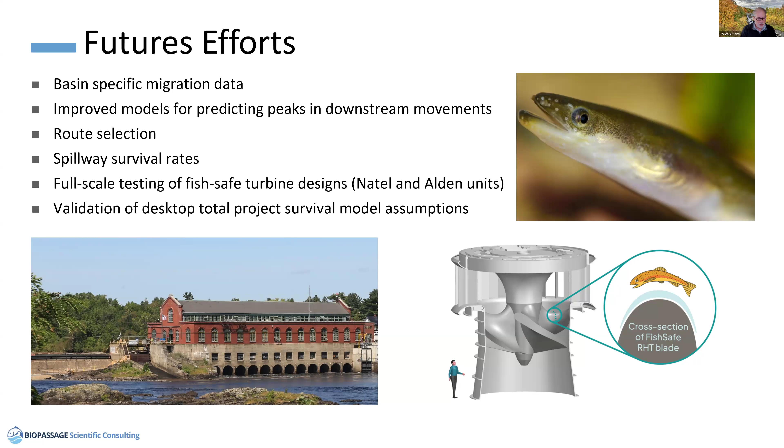I did have a couple of slides on what a collaboration of all the organizations that have been involved in eel testing may look like, but that will be included with the slides when they're made available to folks.

So, Kathy, I guess that wraps it up there, and we can go ahead and move on to any questions or comments. Sure, yeah, great. Well, thank you, Steve. I can tell you've got a lot of information to share, and I'm sorry we don't have even longer time for you to educate us all on this, but thank you.

So there's two comments in there right now. One's a comment, one's a question. So we might have time for maybe one other one, but the first one, somebody commented that the Coanda systems don't work, and that I guess their experience is that they're clogged with zebra mussels. So do you want to comment on that in any way?

Sure, I mean, they've had mixed results. I would definitely agree with that, based on our own experience with them. It would be interesting to see how the one in Connecticut performs. The eel entrainment should be really minimized with the narrow space in there. It's a small intake, so there's ample opportunity for the eels to find it. Yeah, definitely zebra mussels would be an issue for projects where they occur, and debris management of those systems can be a problem as well. So definitely factors that you have to take into consideration if you're considering a technology like that.